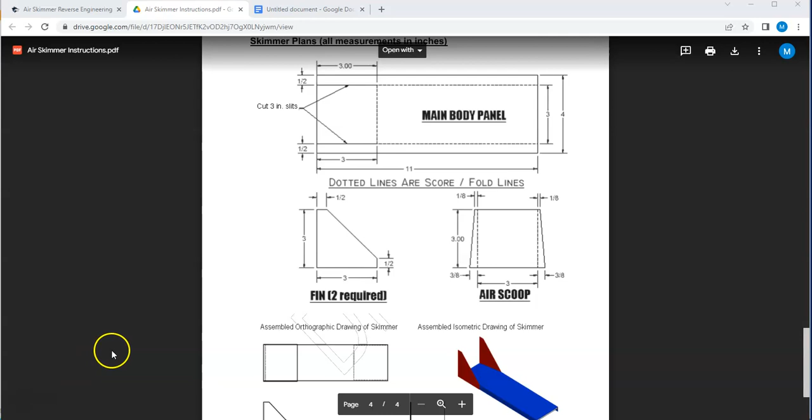So the first thing we need to look at are the dimensions. If we look in this area you can kind of see how it's laid out, but I'm going to look also at the main body panel, and I can see that the inside dimension of this fold is 3 inches.

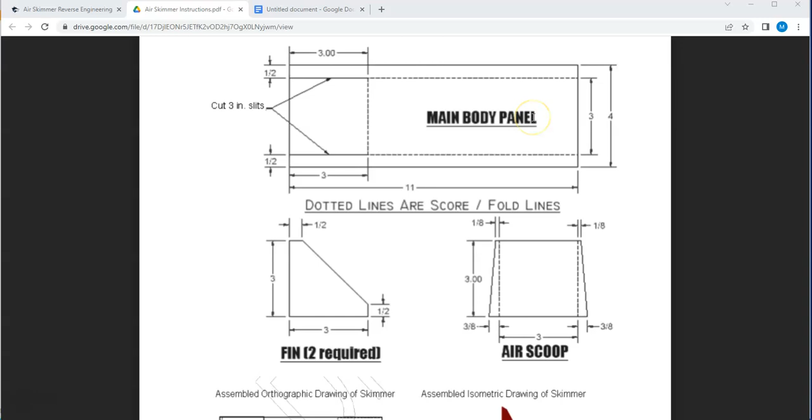So I'm going to go into Inventor now. I just have a blank brand new part opened up, and I'm going to start a two-dimensional sketch on the XY plane, and proceed as if I'm looking at this from the front view.

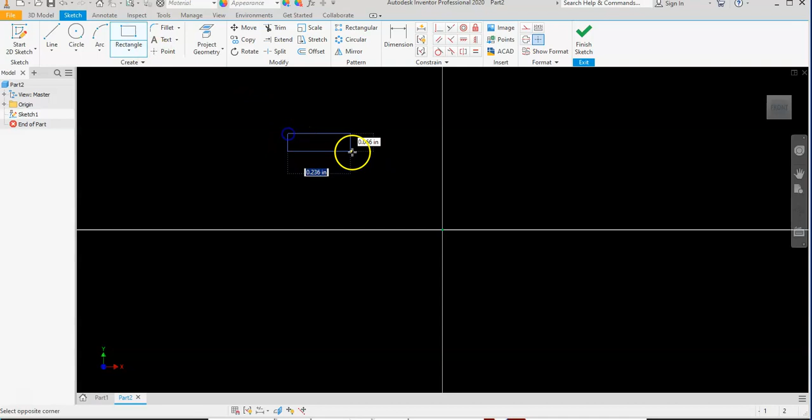So I'm going to draw a rectangle, and the length of this is going to be 2.9 because it needs to fit inside of the 3-inch main body panel. If the inside dimension of the main body panel is 3 inches and each one of the little folds is 0.05, I need to take that away from 3 inches, so I'm left with 2.9.

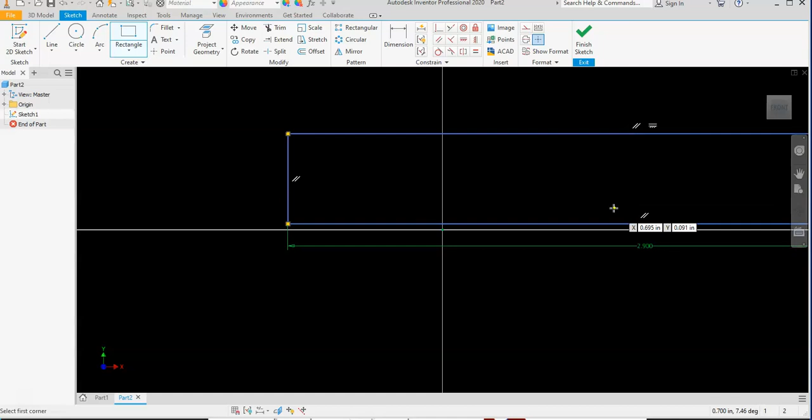So that's 2.9, and then the height there is going to be 0.375, which is 3/8 of an inch. If I focus this, just click the front view, you can see this is 0.375 by 2.9, and I have a rectangle.

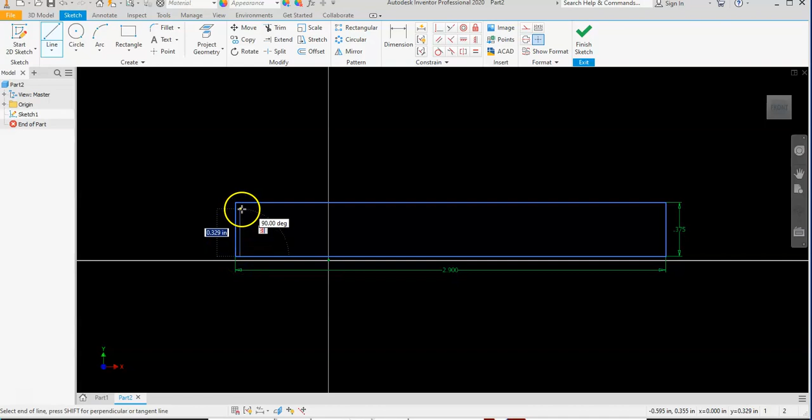Now I'm just going to use the line command to draw within kind of the perimeter of this rectangle. Just make sure you get lines that are perpendicular, they're 90 degrees, and then we're going to dimension.

And remember, the thickness of our cardstock was from one side to the other, 0.05. So I need to do that all the way around.

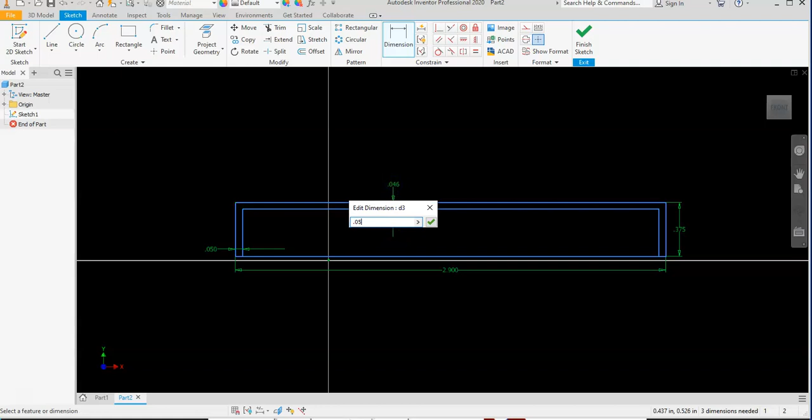On the right side, I just click from one line and click to the next, and then I drag it to the position that I want the dimension, and then click, and that's where it's going to be. That's the last one, 0.05.

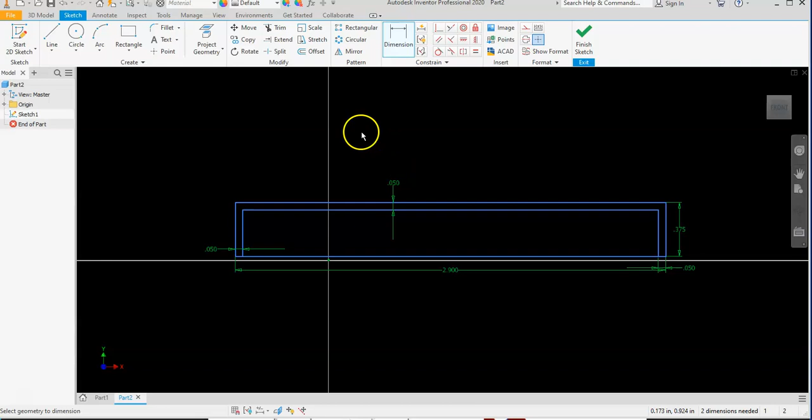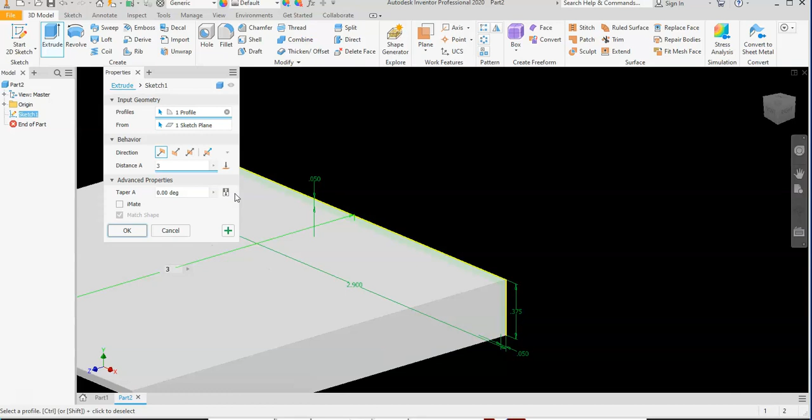And now I can trim this bottom segment out and finish the sketch. Zoom out so you can see a little bit. Then I'm going to extrude this shape 3 inches. If I click home, that'll kind of refocus it there. Click OK. Alright, but we're not quite done.

We need to angle this. So I'm going to start a new 2D sketch on this side, on that surface. And I want to use the dimensions from this rectangle, so I'm going to project the geometry from this side.

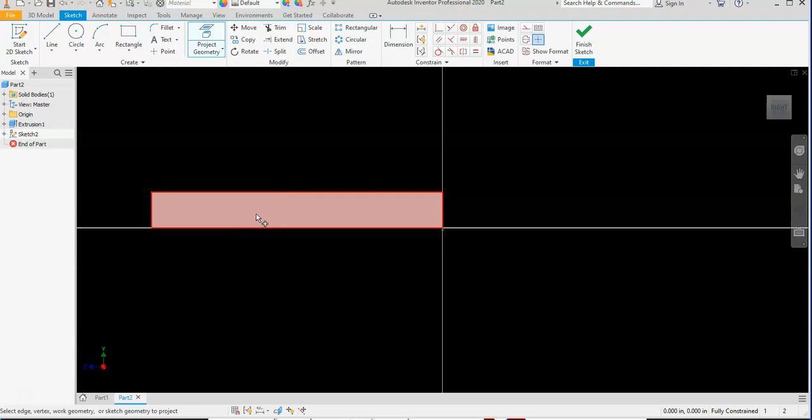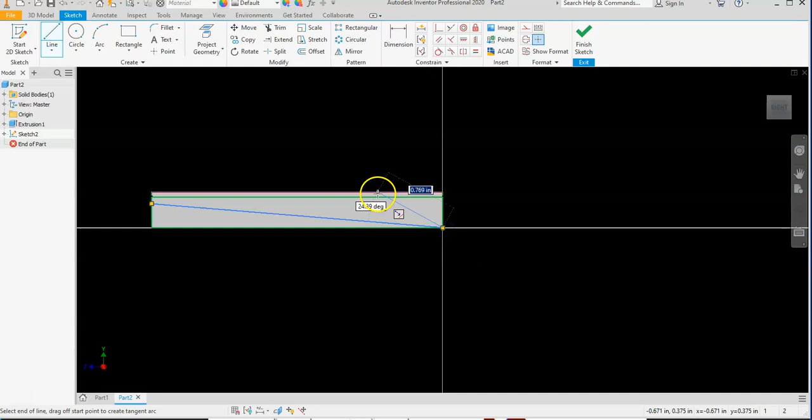So I click on it, and that projected the geometry there, which allows me to include these sides that I already have. I just draw a line now, select the line command, and I want to go down right about there to this corner, and hit escape, or just right click and go to OK to end the line command.

Make sure you're right on the corner. Get back here, and I just need to add one dimension. The dimension from the very end point of that line that we just drew to this top edge should be 0.125, which is 1/8 of an inch.

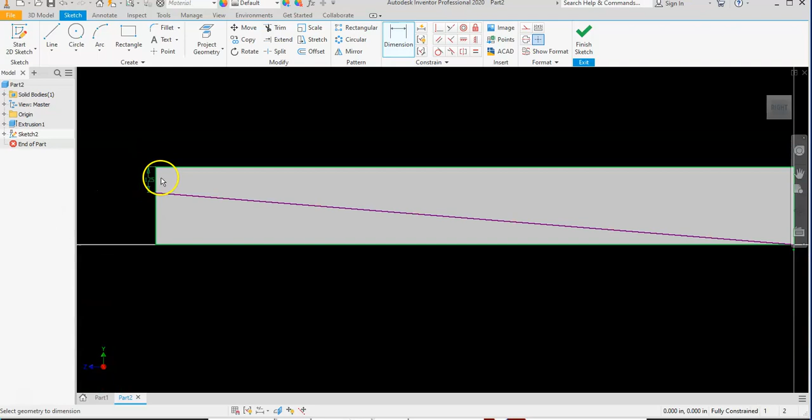And you might wonder where I get that dimension. If I go back to my sketch, this fold, the front part should be 1/8 of an inch, and the back part should be 3/8 of an inch. That's where those numbers come from. So I'm going to finish the sketch.

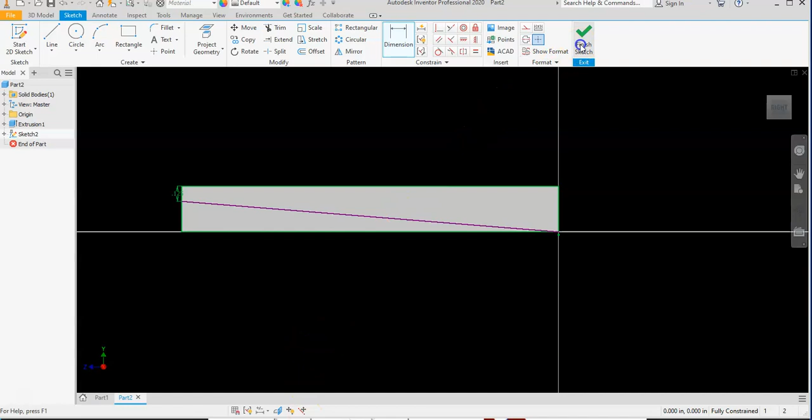Then I'm going to extrude this bottom section right there, and I want to cut that. I want to get it taken off, so I'm going to use this command right here, cut, click OK, and now I have the scoop.

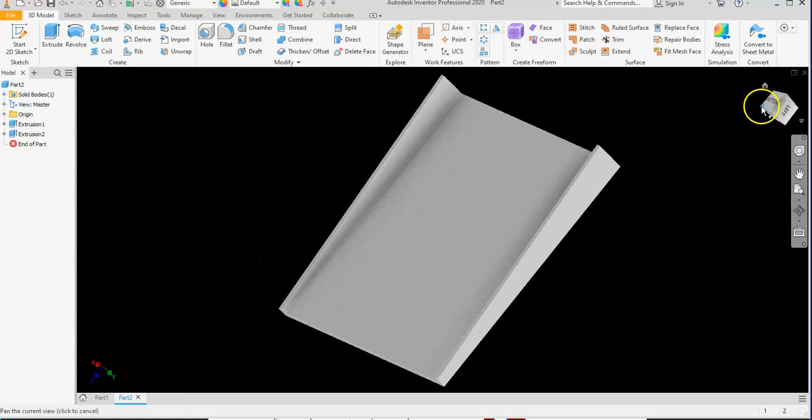I just need to turn it over. When I assemble this, it's going to kind of go - you can see this is the front edge right here. The leading edge is the shorter edge. But that is the proper way to assemble this particular part, the front scoop.

Alright, so you want to save that. File, save as, and just call it front scoop.

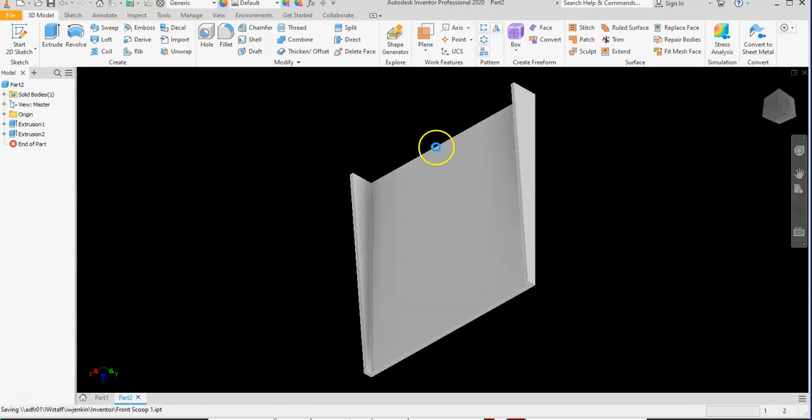Alright, and I'm going to go ahead and show you how to assemble this. So if I go into my assembly, I have the air skimmer right here. I'm going to go ahead and open that up.

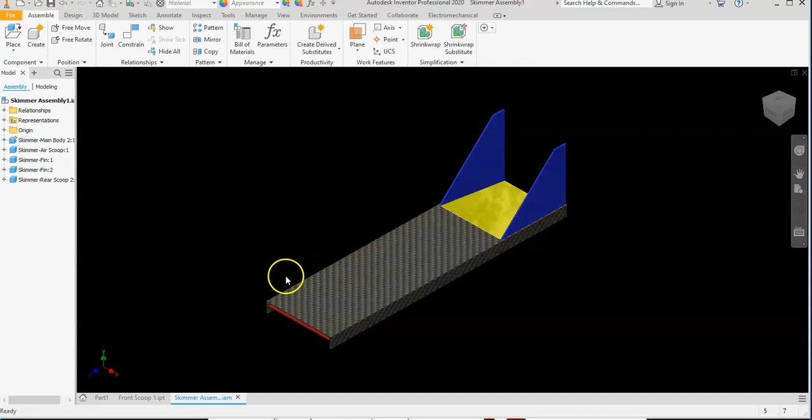And you notice this one is already assembled. It's a little different than yours because I put the fins on the inside. Your fins should be on the outside edge of the main body panel. But the front scoop is the same. So all I need to do here is basically identify that part - this is the front scoop.

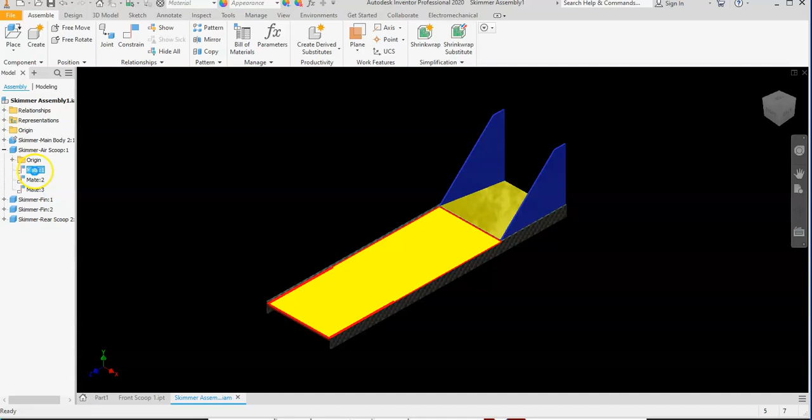Open that up. It has 3 constraints on it. I'm going to delete these just so you can see how to do this. That way I can move it out. If I could get attached here - select the thing that I want. There we go.

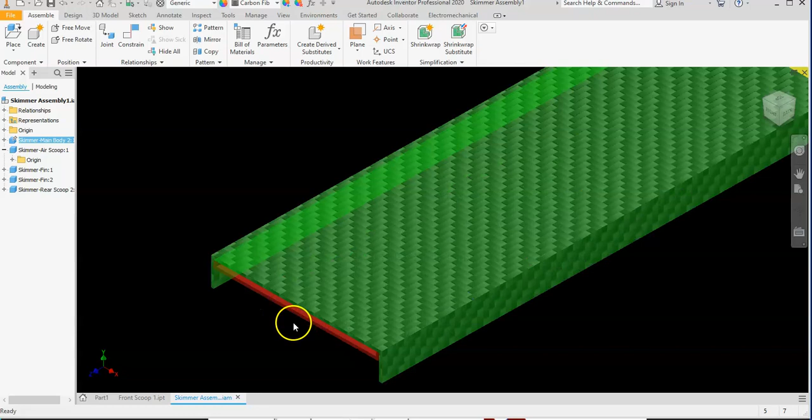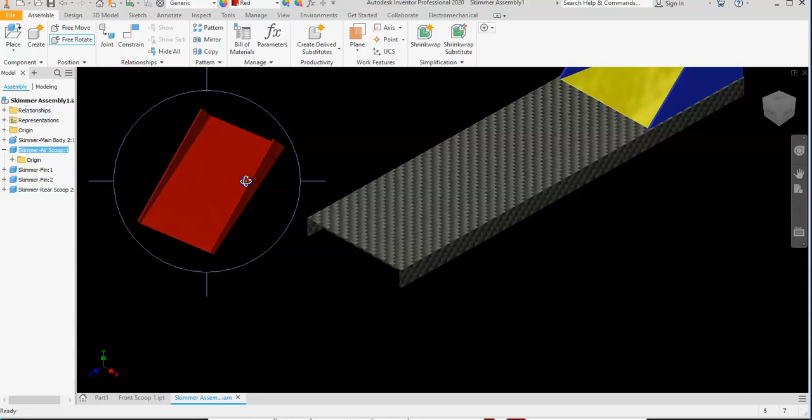Okay, so let's say you've created an assembly and you've got your main body panel. The way you're going to attach the front scoop - if you right click on it, you can free rotate because yours will probably be more kind of upside down like this. You're going to want to rotate it so that these narrow edges are facing up.

Once you have that, just hit escape, and then you'll go to constrain, and you're going to select this very thin top edge of the fold, basically right there. And this is going to be a mate command, by the way. So mate this thin section.

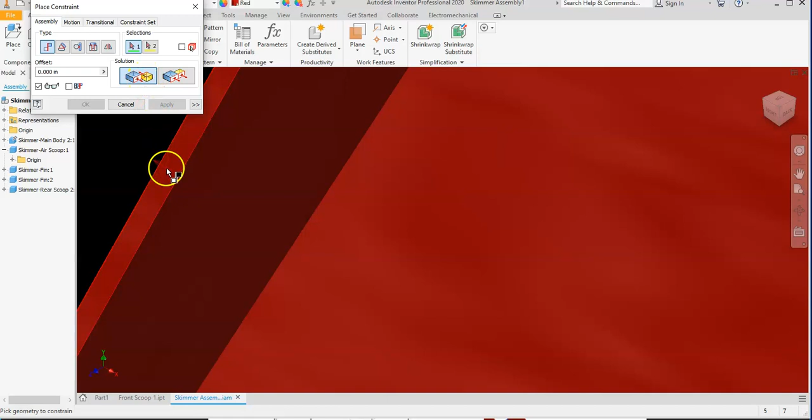Zoom out, and then use your view cube to rotate so that you can see the bottom edge of the main body panel. And we're going to mate those together right there. I'm going to click apply.

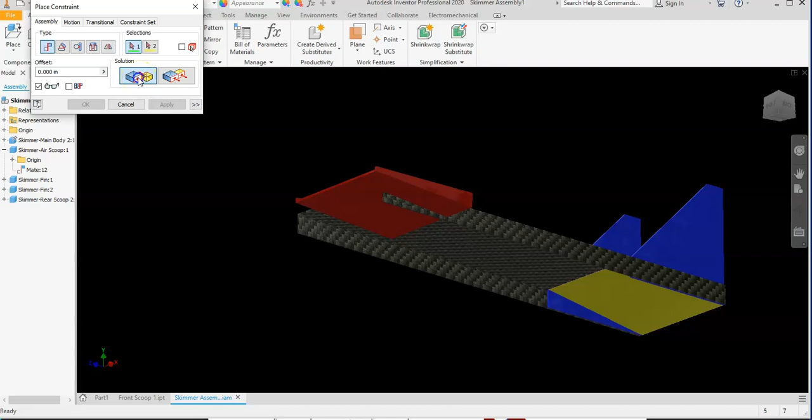Now I'm going to mate this edge of the main body panel to the edge, this side right here of the front air scoop. Apply. Alright, and I'll click home so we can kind of see that's all attached now.

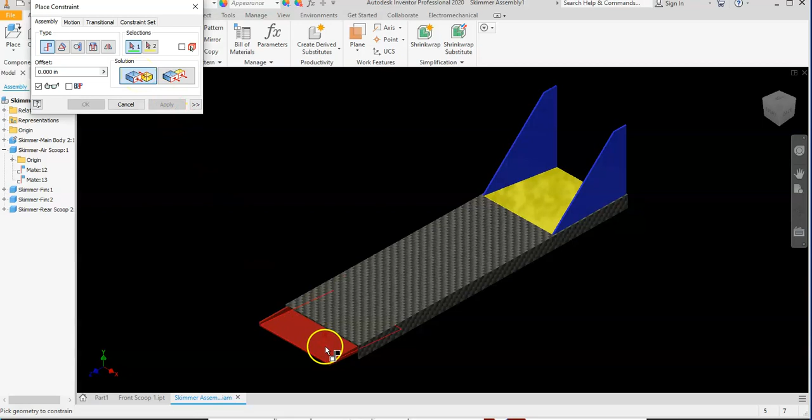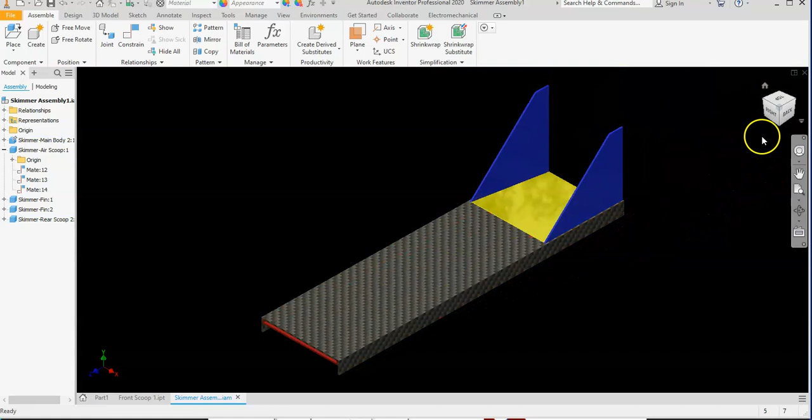But you notice it's kind of stuck out here. So what I need to do is another mate. This time I'm going to mate this very small line segment right there to this line segment on the main body panel. Click apply, and I can close the constraint menu, click home, and now I've got the front scoop installed into the main body panel.

Alright, so that's it for building and installing the front air scoop on your air skimmer project.